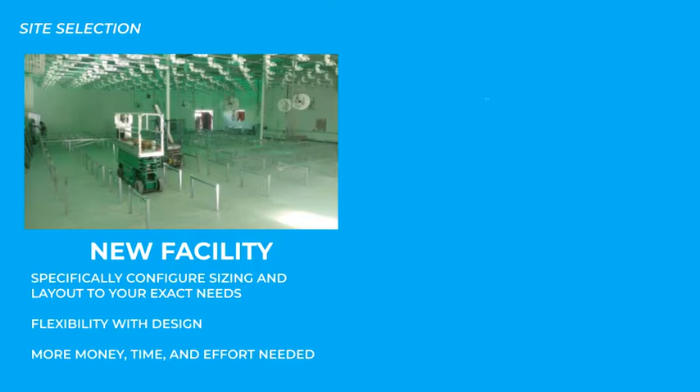Both options have advantages and disadvantages. If you are considering a brand new facility, what you have to keep in mind is that it's going to take longer to build something from scratch due to the engineering, time, and effort involved. It'll allow you to specifically configure the sizing and layout to exactly what you need, making it much more flexible, but it will require significantly more funds, potentially to be raised by investors or something of that nature.

As for the retrofit, it's normally the faster of the two routes, which can actually be an issue as well. We've seen many people who rushed into utilizing old buildings, like used factory locations, and the initial launch goes smoothly, until they start looking at some of the things that need to be either upgraded or completely replaced.

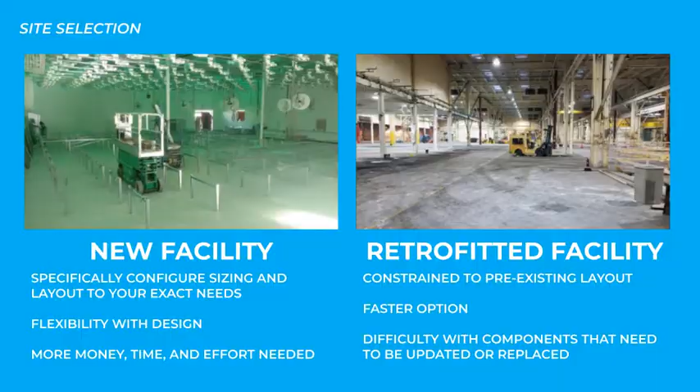When you go to retrofit something, building codes have to be updated to current standards. If you leave certain things in place and keep them as is, it isn't an issue. However, if you want to change something or create something new, everything needs to be brought up to today's standards, which can be costly and take more time.

That being said, the retrofit can still be completed substantially faster and at a cheaper cost. If you go that route, you want to make the decision while assessing whether it's the right place to do what you need to do, with a good understanding of what it's going to take to bring it to where it needs to be.

If you do that correctly and you are somebody who's open to the challenge, it'll be significantly faster and cheaper, and you will be able to start generating revenue sooner.

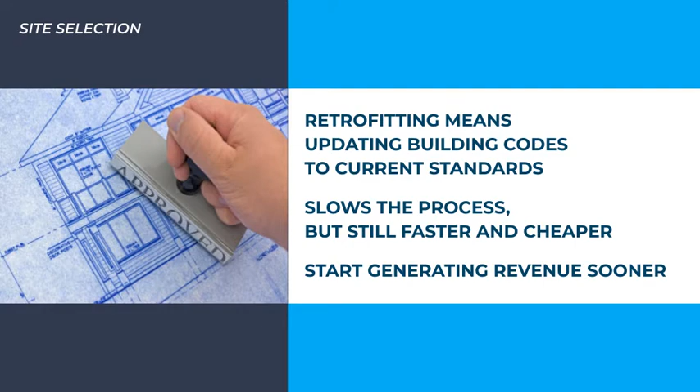With any of these projects, when considering the mechanical side and the HVAC components in particular, the earlier the better. If we start planning environmental control before we've even broken ground, we can look at the engineering and where things are being placed to determine how to install it most easily and effectively.

With different levels of legalization throughout Canada and the United States, a great deal of care and attention must be paid to the laws of the municipalities in which you are residing and operating. Aside from acquiring building permits and meeting other standards, the most prominent roadblocks we are often faced with involve appeasing those who are opposed to the relatively new, controversial industry. These include operating a certain distance away from schools or residential areas and following specific zoning requirements.

On occasion, inspectors can become fixated on one particular aspect, oddly focusing way more on that than all the other work that has been done throughout the facility. In that case, you have to be prepared to jump through the hoops, make the specific changes to appease them, and control the situation.

What we found helpful is using a local builder or construction firm who has dealt with those municipalities and inspectors before. If you're in a commercial spot, do not use a residential builder. Use a commercial builder who's done a factory or something, who understands the requirements at a highly localized level.

This process can be frustrating, but it's important to not lose sight of the end goal. Yes, it's going to probably be 3 to 5 times longer than you had anticipated, but once you get through it, things become much easier.

Along the same lines, being respectful of your neighbors and the general area and exercising extreme discretion is highly recommended. While you can push back on people in the community, as long as you are within the confines of the law, doing so does not make things easier and always attracts unwanted attention.

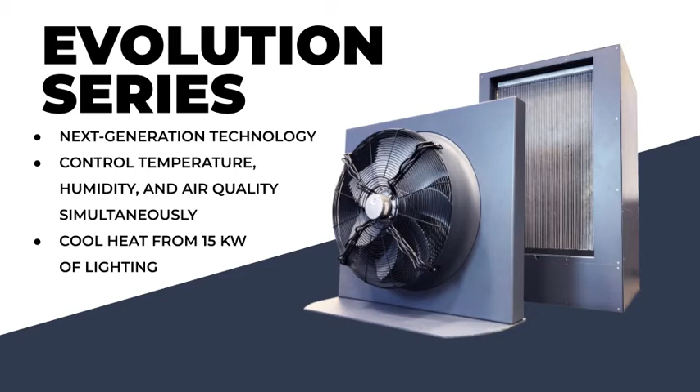Without that redundancy, by utilizing the Evolution series for a long duration, you will get the most dehumidification efficiency out of your system. In general, upon initial startup, it takes 5 to 10 minutes for the system to reach maximum efficiency, so it's important to keep it running, which is why sizing is so important. When it's in that zone, it's not only cooling the air more efficiently, but it's also extracting as much moisture as possible.

If you have a system that constantly cycles on and off, it takes 15 minutes to properly achieve dehumidification. But if the system turns off within 15 minutes, it's never running at its peak state and will never achieve the desired temperature and humidity levels. Power availability is definitely something to consider, as people often don't realize just how much power is required, especially with so many miscellaneous variables throughout the process.

This leads us into our next segment, which is method and design. How does power play into our method and design? Well, the type of operational design you select—be it a large open space, a multi-rack facility, or a container—is also going to be driven by the amount of allowable power, so these things are all interconnected.

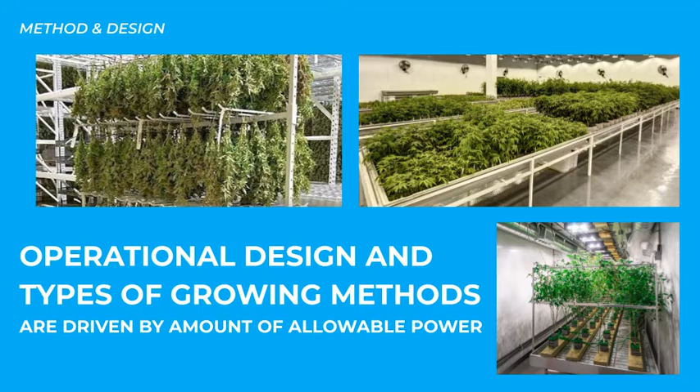When it comes to growing cannabis, operating in vast open spaces with large floors, tall ceilings, and lights everywhere is only one method. That said, it's certainly one of the more popular growing methods, as it requires the least amount of additional work, providing you with a lot of vertical space above to do whatever you need, like hanging units, running ducting, and setting up a lighting grid.

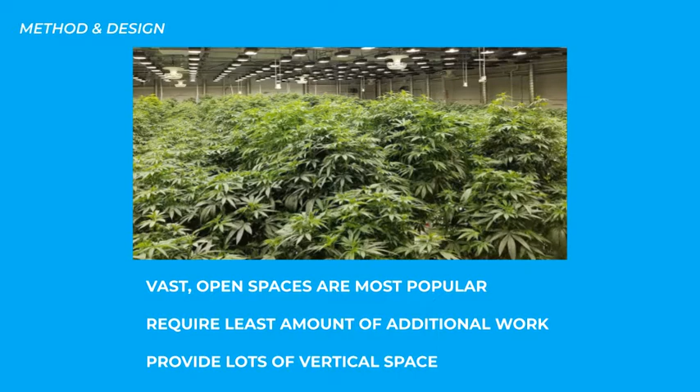Preferably, though, from an environmental standpoint, we don't want ceilings that are too high or too low. What would we consider too high? We definitely want to stay under 16 feet because anything taller results in stratification, where the air basically layers. What would we consider too low? We don't want anything under 8 feet, because then there wouldn't be sufficient room for everything. Ideally, the sweet spot for creating the optimum grow room environment is a ceiling around 12 feet, though there is some room for slight flexibility.

With 12 foot ceilings, you still have lots of space, but not so much that the air can't be properly circulated throughout the room. In terms of environmental control, if the units are placed too high up, getting the return air back from the cold air down below to up top, and vice versa, becomes quite challenging. This increased difficulty in mixing the air and directing it to the source could lead to serious drawbacks, especially with the potential for added complications from an airborne virus, mildew, or infestation introduced into the grow room.

In the event that one large room had exposure, this could lead to the entire room's worth of product needing to be destroyed. Instead, what we recommend is to break large spaces into more manageably sized rooms, which gives you greater control and reduces the risk of major contamination, while still providing the ultimate flexibility and versatility of multiple systems and hedging against the worst case scenario.

These rooms don't have to be so small as to only have 15 lights, but they should definitely be sized to require under 100 lights. In our experience, we've found that grow rooms adequately sized with 45 to 50 lights and three 5-ton systems seem to work quite well. This more manageable setup allows you to get into a rhythm where you can take down some product each week or every other week, instead of harvesting all at once.

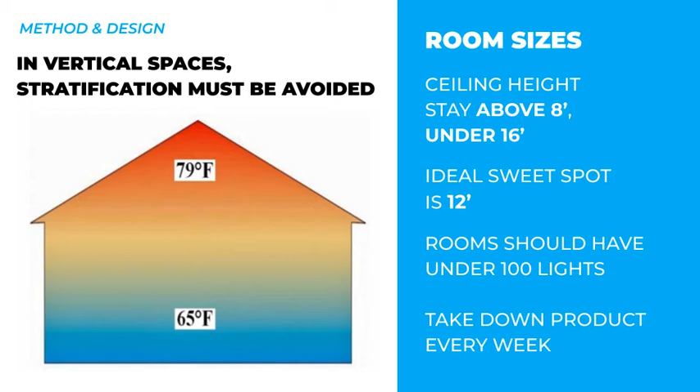Another method that has become more prevalent involves the use of multi-racking systems as a vertical growing solution, as people want to fully utilize smaller spaces due to cost and availability, especially in metropolitan areas with large populations. While this does allow you to do a lot more within a lesser area, the major drawback is that perfecting the environmental control components has never been more imperative.

This is because these racks are much tighter, usually 8 feet or under, which poses challenges with regard to getting return and supply air in and out of the canopy evenly. Because heat naturally rises, if you're not engineering the room properly, each rack is going to be exponentially warmer, leading to the warmest rack at the top.

We've often seen this in terms of density-related issues, whereas the light placement is already quite dense. When new layers are added, the heat density is so extreme that temperature control becomes nearly impossible without systems as small and compact as ours. This is similar to a server room setup, where intense electrical requirements leave very little room for adjustments.

These vertical growing setups are where Excel air systems, ducting, and layering strategies come into play as a huge defining factor, as we have the expertise to guide our customers through each step. We've worked alongside many growers, helping them achieve their goals to great success, and we are excited to share most of that with you in part 2 of the Sealed Rooms webinar.

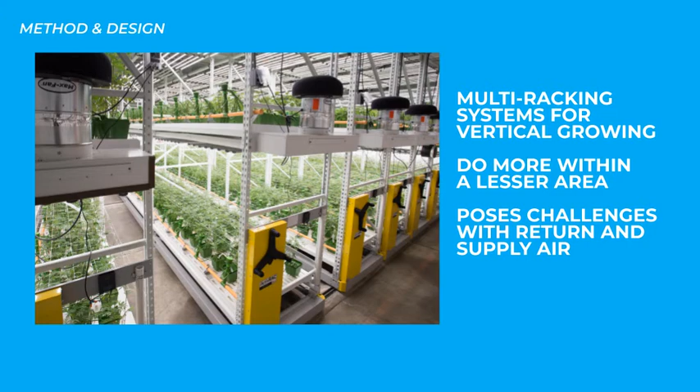Additional cannabis growing methods involve smaller alternative setups using intermodal shipping containers. It's a very tight process that you can utilize to get into some really tight spaces. Much like with multi-rack vertical growing, these growing methods evoke their own set of problems. Containers usually only have one system in them, but are sometimes equipped with 2. When dealing with tight spaces, applying an innovative solution specifically engineered for these applications is certainly something to consider.

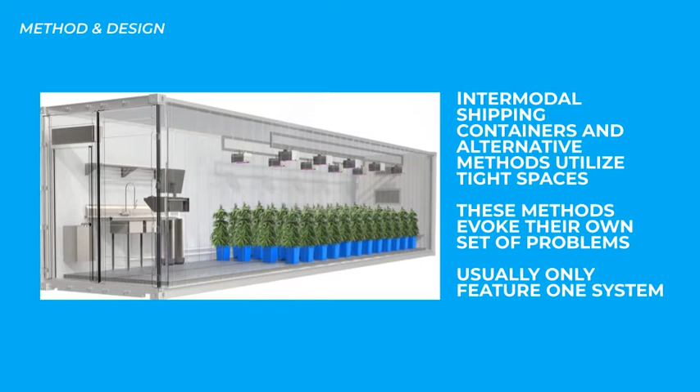Once you've selected a growing method, we can look at how we are going to implement that concept. It's important to note that while these decisions need not necessarily be made in a specific order, they all do intertwine. For instance, your lighting selection can actually impact which growing method is best.

If you were to choose LED lights, it should be with the understanding that they are intended for tighter, more compact spaces, as they produce about 25 to 30% less heat and need to be much closer to the plants. They're also more expensive. If your facility has a large open area with a 16-foot ceiling, you have to decide if that actually lends itself well to the setup, as your LEDs are only going to be several feet from the top of the canopy, with unused, wasted airspace above.

Alternatively, if you go with HPS lights, they can be 8 feet above, as their intensity is way higher. Therefore, you really have to first decide what kind of lights you want to use, then what the power factor to each of those is, and then calculate what the throw of that lighting is based on the total heat load and maximum amperage.

Once those key factors are in place, you can consider additional components such as wall fans and pumps, but as a starting point, knowing your general light load allows you to determine your minimum or maximum required number of systems.

If you have the space, but don't know what kind of lighting you are going to choose, it's difficult for us to help you achieve your full potential, so that's a big factor we consider.

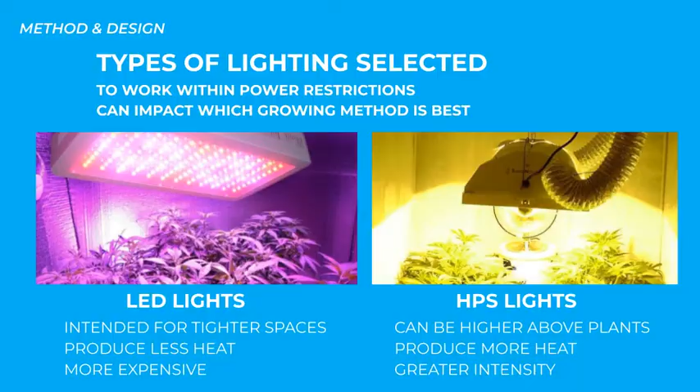Alongside this are room size, height, and density, which, while depending on your chosen method, can still change. Most notably, the factors affecting your facility's design will change based on your choice of a new build or a retrofit. For example, if your facility has an unusual L-shaped room, you're going to have to adapt your setup to make it work accordingly, which not only directly relates to airflow and lighting configuration, but also aisle layout, as you have to be able to easily navigate throughout the facility.

This also ties into how many rooms you are intending to set up for each function, such as mother rooms, clone rooms, veg rooms, bloom rooms, trimming rooms, and drying and curing rooms.

The previously mentioned multiple room staggered yield setup makes the assembly line process like clockwork, but the more bloom rooms you have, the more mother rooms are needed to provide clones.

Furthermore, each type of room requires a different method of environmental control. For example, in mother rooms, veg rooms, and clone rooms, you're going to need a high humidity environment in which these plants can thrive in their vegetative state. Although we don't want humidity too high, during night cycles, constant air temperature control is needed to ensure that they are still warmer and more humid.

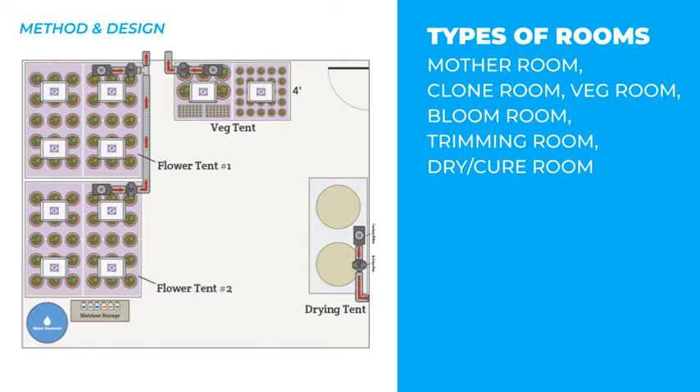Depending on your system, your air conditioner might be extracting all the moisture. This is where a product like the Cloud Maker, our new upcoming mass humidifier, which will be launching by the end of the year, will prove effective in helping these plants thrive during their early stages.

Then generally, when converting into larger rooms, the drastic change of going from an environment compared to that of a rainforest with high humidity to that of a desert, much drier with higher heat load from the increased lighting, can be quite stressful to plants, as they are not yet large enough for full transpiration to give off enough moisture. The system will suck it all out, which places them in a stressful state for a week or two.

Excel Air Systems' environmental control technology allows you to temper the process by adding humidity for a smooth transition, sort of a balancing act. When implemented correctly, this will mean happier plants and much better yields at the end of the line.

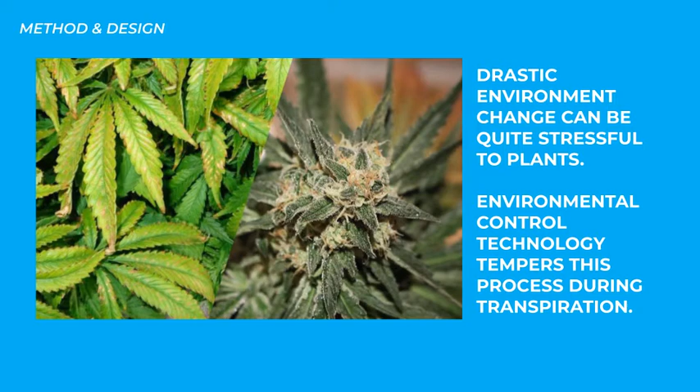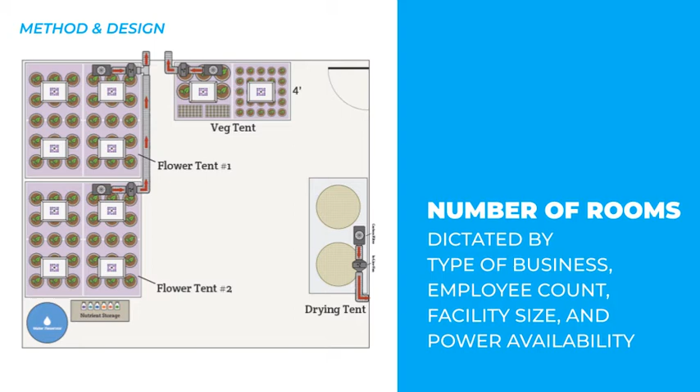As for the number of rooms themselves, this requires a lot of thought and will be dictated by the type of business you are running, the employee count, the physical size of the facility, and the availability of power, among other factors. This means even looking at things as basic as main hallways and individual entries to determine the best facility layout. All of these things matter, so by taking them into account, we are able to get you a setup that is specifically designed to your requirements and needs.

For example, we consider aspects as basic as the entrances, whether there's going to be one main interior corridor, individual exterior entries, or roll-up doors. Each of those choices has pros and cons.

From a security standpoint, if you have one main hallway and the rest of the structure is a brick wall, you don't really have too much to worry about. In contrast, if you have 16 rooms, all of which open to the outside, then those 16 doors all need to be properly secured. That being said, the benefit of doing something like that is that you can consider each space independently from the other, deciding where to put the condensers, where to hang the air handler, and how to run the line sets. In general, the manner in which we consider different setups to determine these layouts is quite efficient and greatly beneficial in reducing installation time.

Having determined the type of method, layout, and lighting, we now have a really good idea of what your facility looks like and what we are going to be needing, to then proceed by using a general rule of thumb.

Our rule of thumb is that one 5-ton Evolution series cools 15,000 watts of heat load with outdoor temperatures between 80 and 85 Fahrenheit, with R12 insulation or better, which means you need 1 ton for every 3,000 watts for adequate cooling capacity. This includes burning CO2 to help with plant growth, as it's another heat source, by elevating CO2 levels for a 15 to 30% increase in yield.

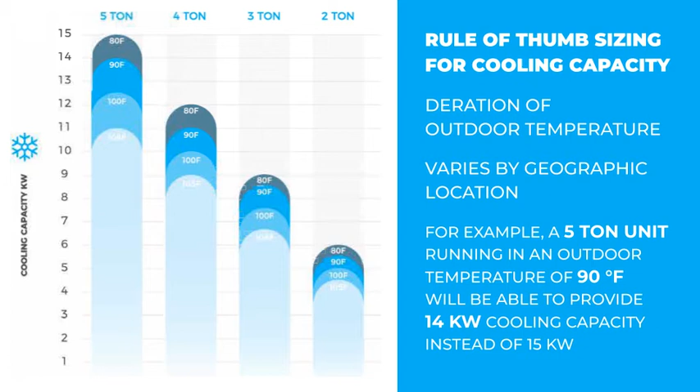In order to do that effectively, you need to have a sealed room, because vents do not confine CO2 to the environment. Once the room is sealed, environmental control technology is required, and that's where Excel Air Systems comes in.

We are also going to look at the size of plants themselves. Some individuals want to grow large tree-like plants on a 20-week cycle or longer, rather than the average 8-week cycle. Why does that factor in? At that size, plants are going to transpire a lot more, meaning your humidity requirements will be elevated, which is why you've got to know your capacity.

Once we have the capacities, we know what systems are needed, so we can lay out exactly where they are going. A big aspect of that plays into airflow design and preliminary ducting, because selecting a general airflow system is simple enough, but without ensuring that it's actually flowing equally and evenly throughout the whole room, the process and outcome are flawed. How are we going to move the air in this space so that we remove the hot and cold spots? How are we going to make sure that it's consistent throughout to prevent stratification?

There's a lot to unpack there, and we want to provide you with a full understanding of those concepts, which is why we will be devoting a portion of Part 2 of the Sealed Rooms webinar to explaining airflow designs in depth. After taking all of these factors into account, we confirm that we have the power available to do these things and secure the solutions to these issues.

Having established this, we then create a free 3D room rendering as part of the consultation process to provide you with a 360-degree view by turning your dream into a reality and customizing every detail with everything to scale. Excel Air Systems lets you see all your ideas come to life. You can then share the impressive concept imagery and technical write-ups with your investors, partners, and builders to strengthen their understanding and provide reassurance by better illustrating the full potential of your product.

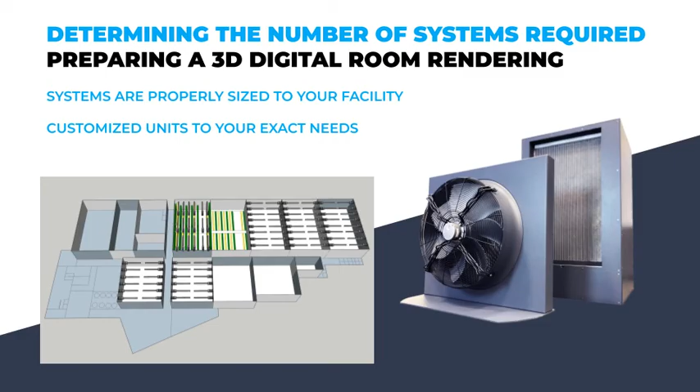Now, with a clearer understanding of growing methods and what facility designs entail, you can form a solid plan of action. Moving on to the next section, we can look at the configuration stage so that you are thoroughly prepared for fast and efficient installation when you receive your new equipment. At Excel Air Systems, we believe in streamlining this process to make everything as convenient as possible in order to help you implement an effective rollout.

A key aspect of this approach is how we utilize redundancy in multiple systems. For example, instead of having you install four 10-ton systems or even one 40-ton system in your facility, we would split those needs into eight 5-ton systems. Why make this distinction so important? In the untimely event that you experience some sort of partial system failure, the setup allows you to continue progressing with minimum impact until the issue is resolved, as the other systems can be adjusted accordingly.

When compared with large system setups, this is by far the most power-efficient selection. For example, if you were running just one large system but you only need to use 75% of that capacity, you'd be wasting power and resources. In contrast, multiple systems can be staged accordingly, so if you have 4 systems in a room, 3 can run continuously while the 4th can be utilized to switch between air conditioning and dehumidification modes as needed. Then, on days with increased exterior temperatures, the 4th system can be brought in to add overall facility capacity.

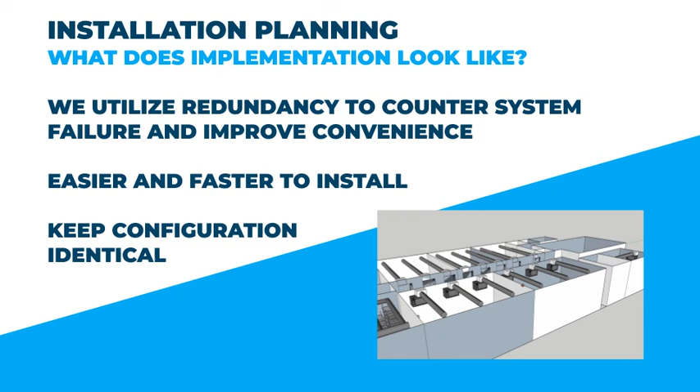By keeping each room's configuration fairly identical, Excel Air Systems also saves you considerable time in the process, as each layout is just a replica of a replica. If you're doing an installation and rooms 1 through 10 are all very similar, if not identical, you are able to improve your speed and efficiency every time you effectively repeat the task. Whether you are installing one system or dozens, every subsequent installation will become easier and easier the more frequently you do it. We've also increased security and efficiency by removing the opportunity for any foreign contaminants to enter your facility via the system.

Even the smallest amount of entrapped water, lint, or metal would push back, breaking the compressor. We achieve this by test running it beforehand in our facility, bringing it into a vacuum state, and completely voiding it of any air. Since even the most microscopic leaks render a vacuum state impossible, you can rest assured that air pollutants and leaks will not be a potential issue, as the pressure check system is fully closed off and leak-free. After this process, we charge the system with the exact amount of refrigerant and ship it to you.

At Excel Air Systems, we prove our experience by offering the only compact air system capable of simultaneously maintaining your desired temperature, humidity, and air quality levels, coupled with an easily scaled installation process. A big part of this lies within our determination to continually look at ways of refining our innovative products to avoid potential issues and ensure maximum efficiency. When you are installing our systems, making the connection is effortlessly done by hand, as all of the components are compatible with our second generation Quick Connect plug-and-play fittings.

With their unique design, you don't have to worry about using any tools, as they each feature a ball bearing that pops into a track after only a few hand turns, signifying that they are connected. Their resealable capabilities also allow you to disconnect and reconnect them without any loss of refrigerant charge. In the event that an issue arises, you can easily swap components.

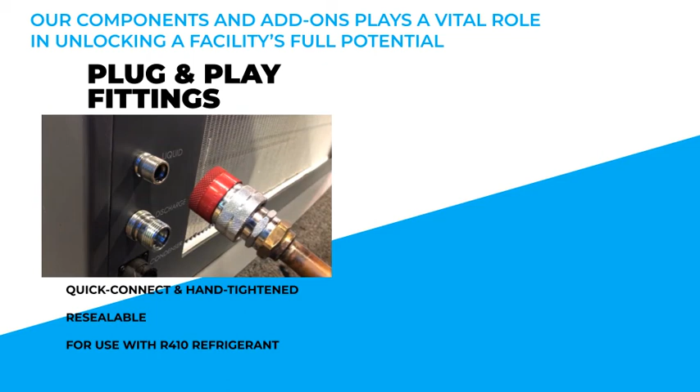For more complex installations where copper pipe could prove challenging, our plug-and-play fittings can be integrated with additional add-ons, such as our pre-charged flexible line set. Together, these products stand out among Excel Air Systems' most innovative upgrades as a total game changer, in contrast to traditional components.

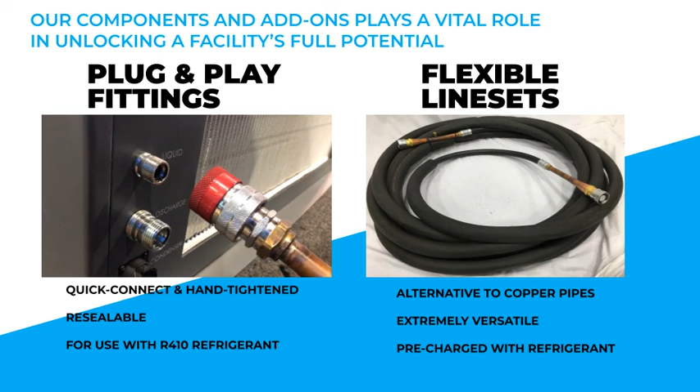With the outdoor condenser and the indoor air handler in place, as long as the appropriate pre-planning measures have been taken, you are literally just connecting a hose with Quick Connect fittings, the same thing inside and outside, then flipping the switch. It's really that simple.

Having established the efficiency of the installation process, we can now go into details of how the order queue process works. After determining the configuration that you're going to go with and having all the desired components in the order sheet, you can then place the order.

Generally, there's an initial deposit required, and then you enter into the order queue, which also ties directly into the building schedule itself. One of the big things we've also advised our customers to consider when ordering is whether to opt for scheduled waves of shipment or have the entire order released and shipped all at once with expected build times. What do we mean by this?

For example, if you need 20 systems, there's a good chance that you're not going to be able to install them all at the same time, especially when setting up a multi-room facility. Receiving this shipment in its entirety before you have the adequate space and resources to properly deal with it could be an impending hindrance that gets in the way.

Although we have no problem sending your order as one large shipment if that's what you prefer, we strongly recommend that you instead have us ship your order in batch releases of a few systems every week. This will give you more flexibility than simply having 20 systems suddenly show up at your front door all at once, leaving you stressfully wondering where you're going to put them all.

As such, we found batch release to be very advantageous for our clients, as this allows you to slowly digest the order, managing the systems by either storing them somewhere at your convenience or having them roll out for installation on an as-needed basis. On our side, it permits a greater degree of flexibility in meeting our manufacturing and release schedule deadlines. Basically, this option helps both parties get where they need to go with greater ease.

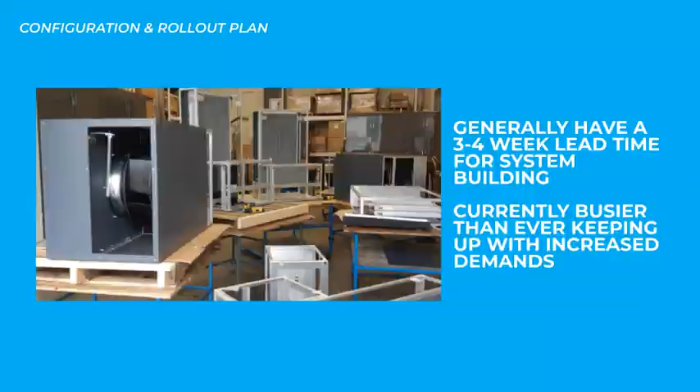In closing, we strongly believe in helping you facilitate innovation through the value of our products. Therefore, we remain committed to providing you with essential resources to better educate you on what sealed room technology has to offer. In doing so, we aim to make it not only so much easier for you, but also substantially more profitable, because we know that our sustained success lies firmly grounded in your success.

On that note, we are looking forward to part 2 of the Sealed Rooms webinar, where we can focus in depth on helping you create the best possible environment for your plants. In that session, we'll be covering the intricacies of temperature, humidity, and air quality concepts with emphasis on the importance of airflow design, so you won't want to miss it.